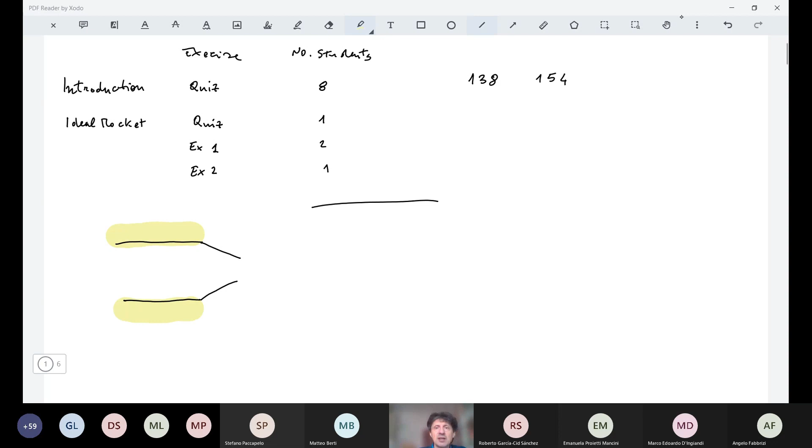So let's see something more. In the last practice class I just gave you an exercise on a solid rocket motor with quasi one-dimensional analysis. We had this problem. We have a converging section here and a propellant which is marked here. So here we have the solid propellant, and the black lines are walls, except where we have propellants.

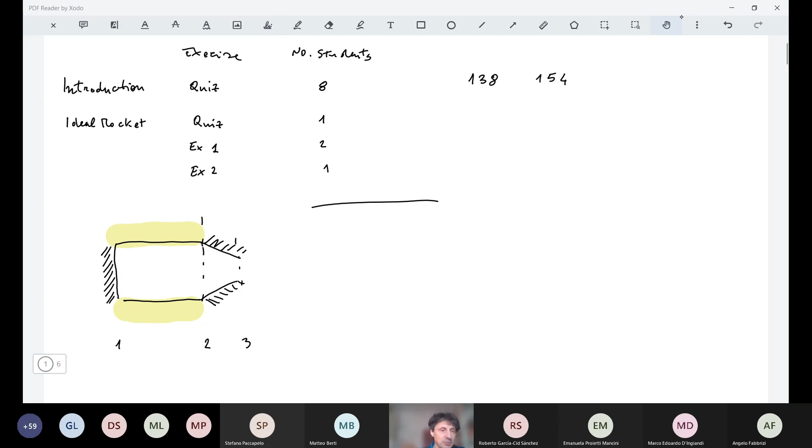So we have a wall here, and here, and here. We consider 3 cross sections, 1, 2, and 3. We have data that should be already available to you from last class: gamma 1.2, R 320 joule per kilogram Kelvin, dot M 150 kilogram per second, T0 3000 Kelvin.

And also the exit area of this convergent nozzle. We know M1 equal to 0, M2 equal to 0.4, and M3 equal to 1. So it's a choked nozzle. And between 1 and 2, we have to consider mass addition with Ux equal to 0 and T0i equal to T0. 2, 3 will be isentropic flow.

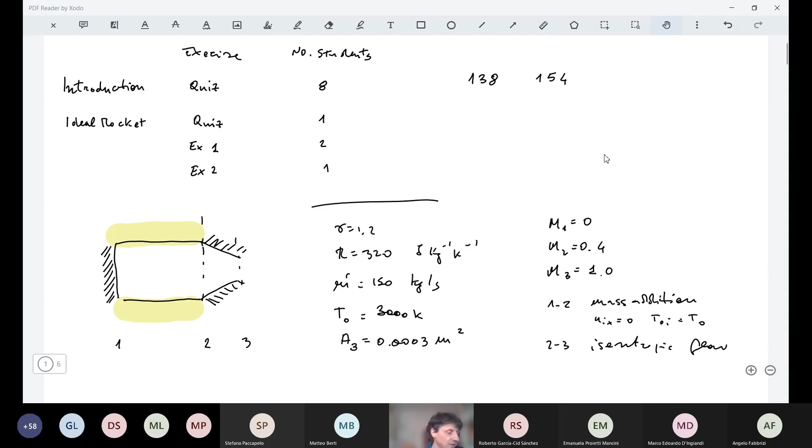So what we have to compute here is the total pressure P01, P02, P03, and also A1, which is equal to A2, is also unknown, whereas we have the value of A3. So I don't know if you solved this problem.

You have to divide it in 2 parts, 1-2 and 2-3, and in each of these parts we can apply a single driving potential, which is mass addition between 1 and 2, and area change between 2 and 3. So we can proceed knowing the Mach number at different positions. So for instance, the fact that we know the value of Mach number in 2 and 3 allows us to evaluate the ratio between areas 2 and 3, and so also the unknown area, which is the same between 1 and 2.

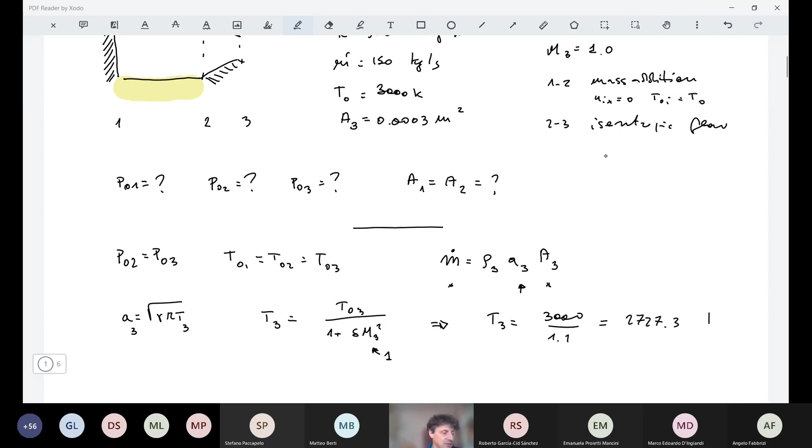And accordingly, a3, with gamma and R from the data, will be 1023.4 meters per second. So the fact that we know all the quantities in this expression except for the density allows us to evaluate this density, the second thermodynamic variable, as m dot over (A times area), and this will be equal to 4.886 kilograms per cubic meter. The density is in kilograms per cubic meter in the international system.

Then for the pressure, we have values with large numbers in the international system, in Pascal, so we often use kilopascal, megapascal or bar. And bar is convenient because 1 bar is close to the atmospheric pressure. So P3, by the ideal gas equation of state, will be rho RT, and it's 42.64 bar.

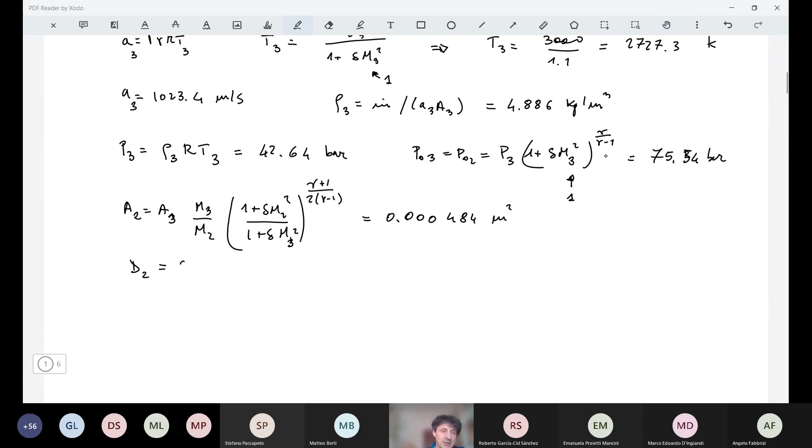If you like to see something without all these zeros, you can say that your diameter will be 2.48 centimeters at the inlet of the converging section, and D3, the throat diameter, will be 1.95 centimeters.

So what remains is the part related to the mass addition, where we have to evaluate the total pressure loss that we know occurs in this case. And so we go back to the relations with y equal to 0. Y was the injected velocity over the local velocity, and if you inject in the perpendicular direction, there is no contribution to momentum from this injection. So we consider the case with y equal to 0.

I recall that the relations were dM over M equals minus 1 plus gamma M squared, 1 plus delta M squared over M squared minus 1, times dm dot over m dot. And we also saw that dp0 over p0 is minus gamma M squared dm dot over m dot. Comparing these, we can eliminate the mass addition and see the relation between the pressure loss and Mach number change in case of mass addition.

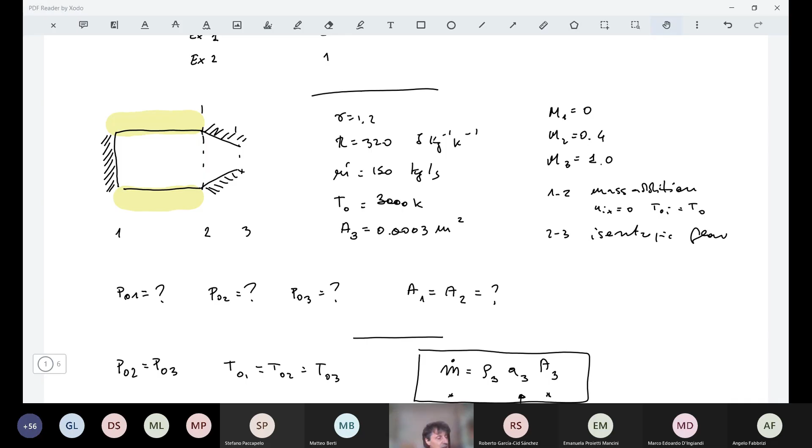So, to sum this up, we have got a number of relations between different quantities that we are using in these one-dimensional problems, and I would like to show you a summary of them that I'll make available, or if you prefer, you always have this in the recording, if that is your preferred way to follow this course. So I have it here.

So you can see this matrix of dependencies, where you have this psi that we see here. This psi is our 1 plus delta M squared, and that appears in many relations. And here you have the relations related to only the area change, only friction as the driving potential, only heat addition, and at the end the case of mass addition with y equal to 0, which is the one that we were talking about in the last exercise. So for instance, in the case that we have only friction, we have no area change, and the same is true also in all these cases. So this is 1, 1, 1.

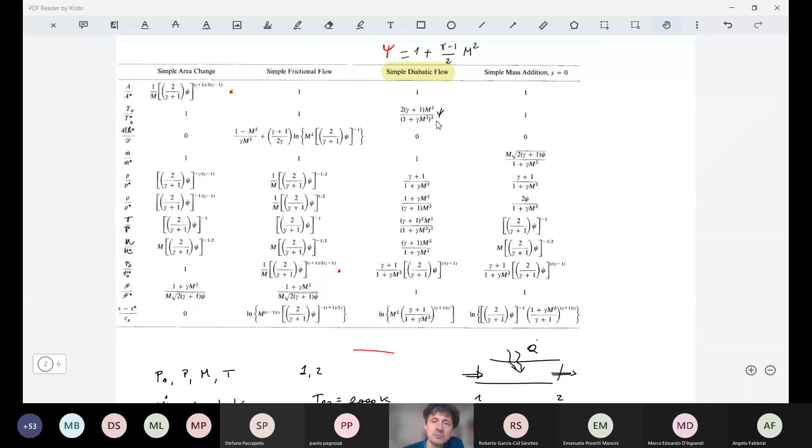The problem that we have is that we cannot extract directly the Mach number from here. So we should make some attempt and try by linear interpolation to reach the final result. So I just copy this expression below, specializing it for our case. And this is our psi that I wrote explicitly. So this should be equal to what we have, 322 over 2000. Or multiplied by 2000, this result I should have 322.

So we can select some tentative value, and we can obtain, for instance, if I try with M1 equal to 0.1, you obtain T01 equal to 86 Kelvin. So it's too low. It means that the correct Mach number is higher or lower than this one. If I have to select a new Mach number to try to close this value, what shall I try? Something less than 0.1 or greater than 0.1?

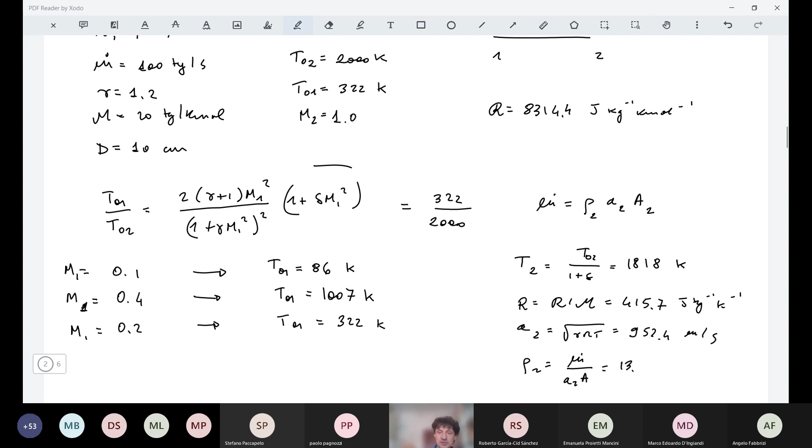The density, as a consequence of the above expression, can be obtained by this relation, and will be 13.37 kilograms per cubic meter. And finally, also the required pressure. Okay, mass flow rate was given here. You see here the mass flow rate, and here the diameter that has been used to evaluate the area. So the exit section has been solved. We still have to evaluate quantities at the inlet, and I need another one of these relations. So I can take this one and calculate pressure, and then the other quantities.

So if I consider this one, gamma plus 1 over 1 plus gamma M squared. This is P1 over P2. And it should be 212 bar. So you see that we have a large pressure change, and it could be interesting to see also the total pressure loss. We can evaluate that at the inlet, where the Mach number is 0.2, the total pressure is not so different. It will be 217 bar, and if you now evaluate total pressure in 2, we have pressure and Mach number also here.

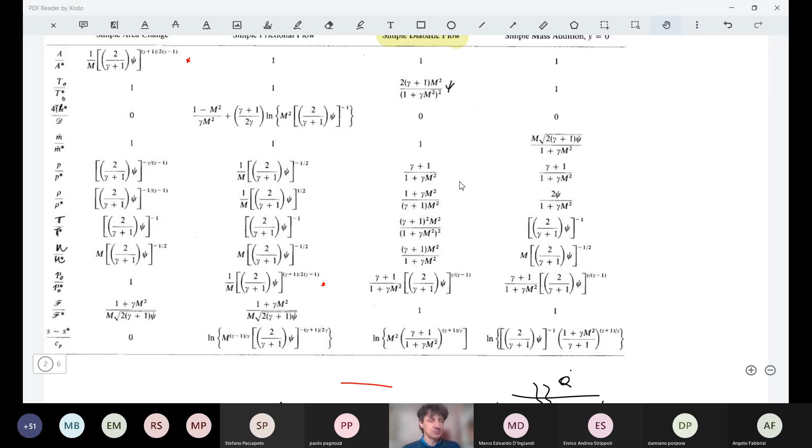So we pass now to exercises related to the ideal nozzle. And we start with the first exercise, where we would like to calculate the exit Mach number ME of a nozzle showing a thrust coefficient in adapted condition equal to 1.8. And we know that gases flowing within this nozzle are characterized by gamma equal to 1.2.

So the first thing that we would like to compute is what is ME with this data, and then we would like also to evaluate the value of DE, the exit diameter. We are considering our supersonic nozzle with exit condition here and throat condition here. So we know that Dt is equal to 5 centimeters, so this is the first part of our exercise.

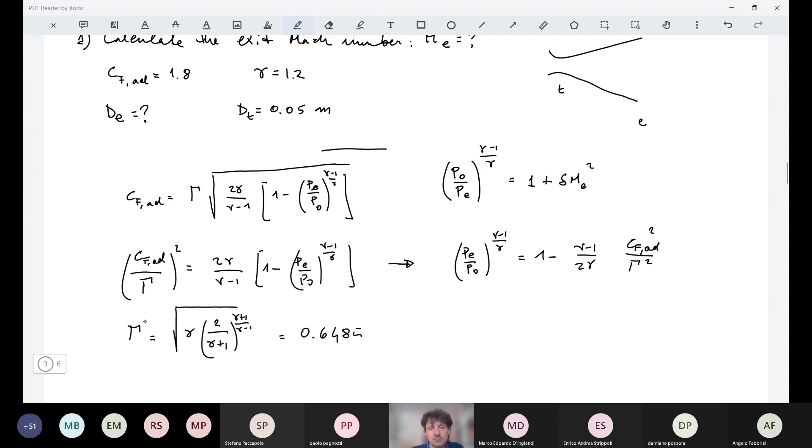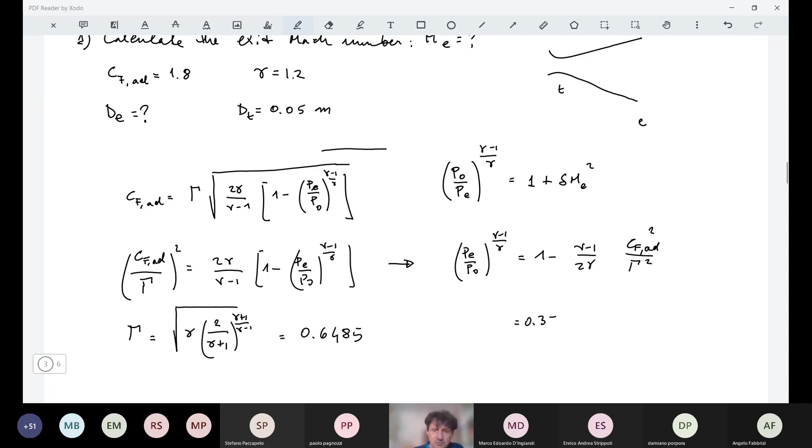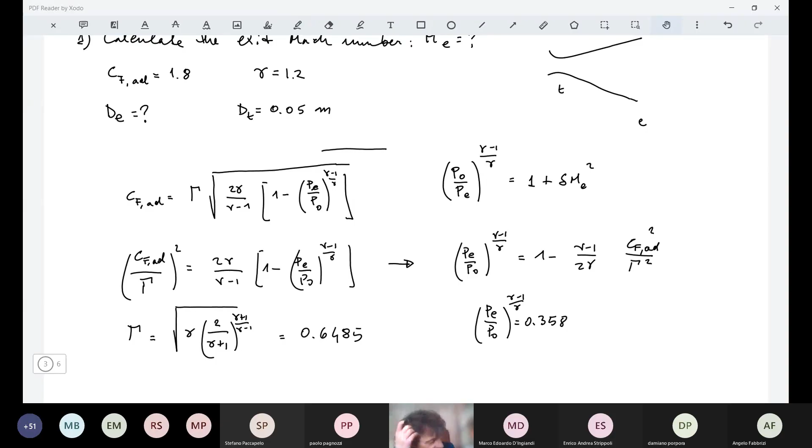And by substitution here, I also can obtain the value of PE over P0 to the gamma minus 1 over gamma, which is the quantity that we need to calculate our ME. So then we can substitute here and obtain that ME is equal to the square root of 1 over delta, P0 over PE, minus 1, over gamma minus 1.

And so we can replace it here. This would be 1 over 0.358. And as a consequence, we obtain that ME is equal to 4.234. So notice here that in this expression of thrust coefficient, we assume that we are considering choked flow. That is one important assumption that we are considering, as well as the one that we used here, which is the assumption of isentropic flow.

So this was the first question. Then the second one is the diameter of the exit, and of course here we can use the area Mach number relation.

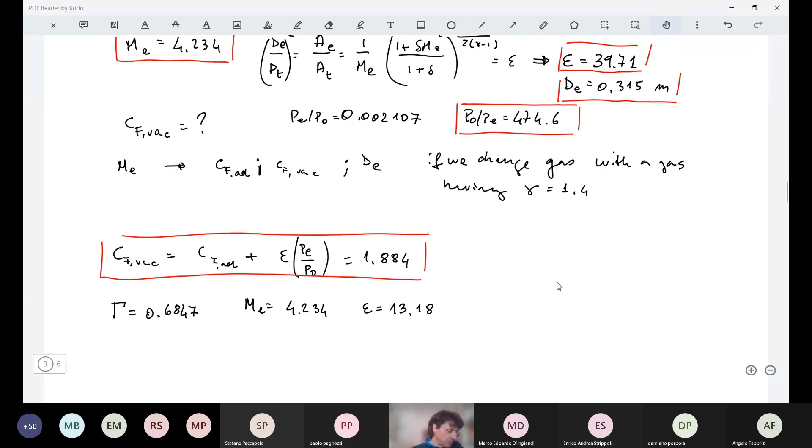So we have ME, of course, is our input. Epsilon will be, in this case, 13.18, to be compared with this one, and you see that it's quite a smaller value of epsilon that is needed for gamma 1.4 gas to reach the same Mach number. And what would be the pressure ratio? So of course this means also that the diameter that was one of the requested outputs is 0.181. Of course it's quite less than what we had before.

And it's also interesting to see what is the pressure ratio we achieve. We have seen that actually we are trying to define our area ratio on the basis of the resulting pressure ratio, so that we can compare with the atmospheric value. And in this case we have also less pressure ratio.

And we have also seen in class that thrust coefficient is improved when you have lower gamma. So here, having higher gamma with this gamma 1.4, we have that our adapted CF will be 1.6 and the vacuum CF will be 1.666. So you see the differences that we have with different gamma with the same exit Mach number.

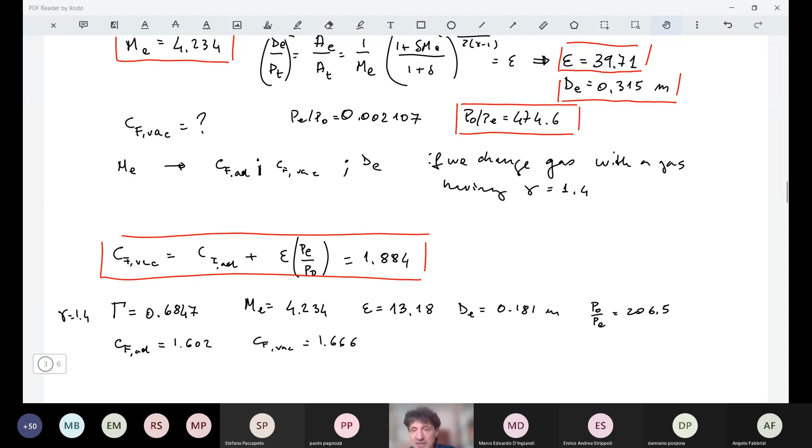This is just with Mach number, it's just straightforward, and we can make also some different reasoning, but we need to iterate. And just to make some consideration, or if you would like to make your iterative procedure, we can compare, for instance, what happens with the same geometry, just changing the gas. So if we have same geometry, it means the same AE over AT, the same epsilon. So instead of considering same ME, we consider now same epsilon.

So we have to find the Mach number such that we have with gamma 1.4 the same epsilon that we have got with Mach number 4.234 and gamma equal to 1.2. So we can make some attempts using different values of the Mach number, and we obtain the right area ratio with Mach 5.6.

So always with gamma 1.4 and Mach 5.6, we have epsilon equal to the requested value 39.71, and to this value corresponds a higher Mach number, as I said, and then a higher pressure ratio: compared to 474.6, it would now be 1035.8. So this is a higher area ratio with respect to the former case, which was 13, and it means that for the same gas we are closer to the maximum value of thrust coefficient.

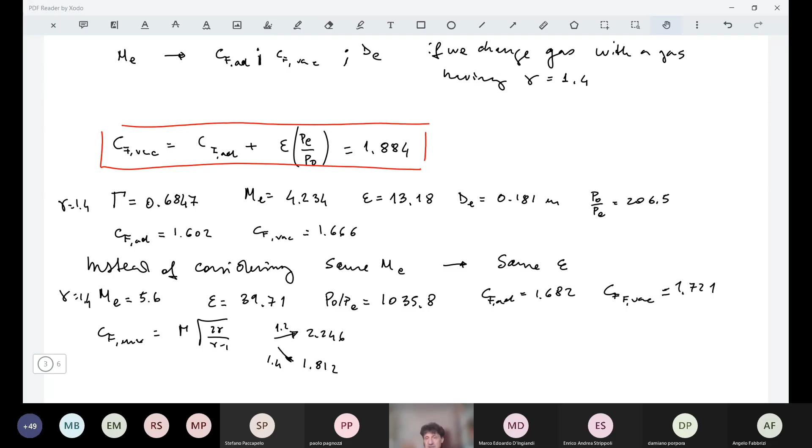So you see here we should compare this value that we got in vacuum with the maximum value, and so it's 1.7 compared to 1.8. That means that we are more or less close to 90% of the maximum value of thrust coefficient.

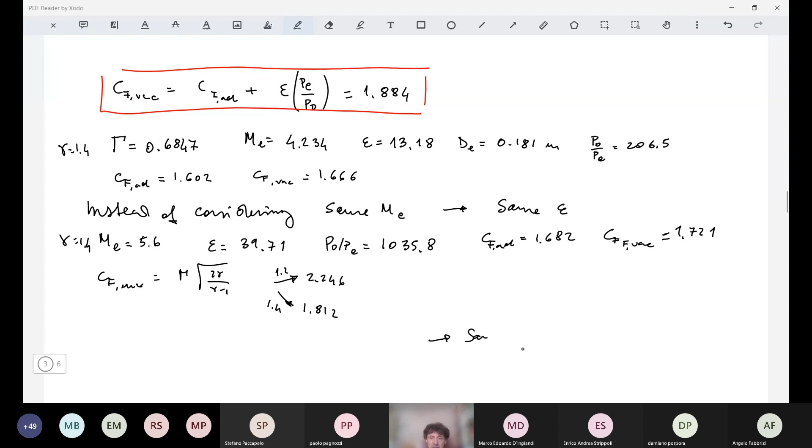Another further comparison can be made now considering the same pressure ratio of the gamma 1.2 case. In this case you don't need iteration, because you have P0 over PE, so you can evaluate your Mach number. It will be 4.9.

And we see that in this case we have something in between. So we have epsilon 23.21, which is greater than the first and lower than the second. And we have, of course, the given value of P0 over PE. And as this area ratio is between these two, this will also be the case for our thrust coefficient: 1.697.

So this was an exercise just to start with relations concerning the thrust coefficient, and this is, let's say, the kind of exercise we should be able to handle easily. And so we can pass now to a second exercise, always related to area ratio, thrust coefficient, and adapted versus vacuum operation. But we introduce here also the characteristic velocity.

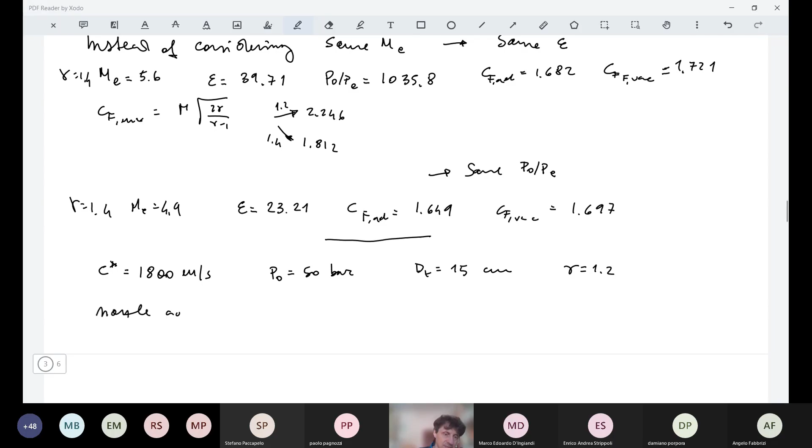So we consider now a nozzle of a gas characterized by a characteristic velocity of 1800 meters per second. We know that we have a total pressure of 50 bar and a throat diameter of 15 centimeters. We know that gamma is equal to 1.2 and that our nozzle is adapted at sea level. So with this information, we should evaluate thrust, specific impulse at sea level and in vacuum condition, and also the thrust coefficient.

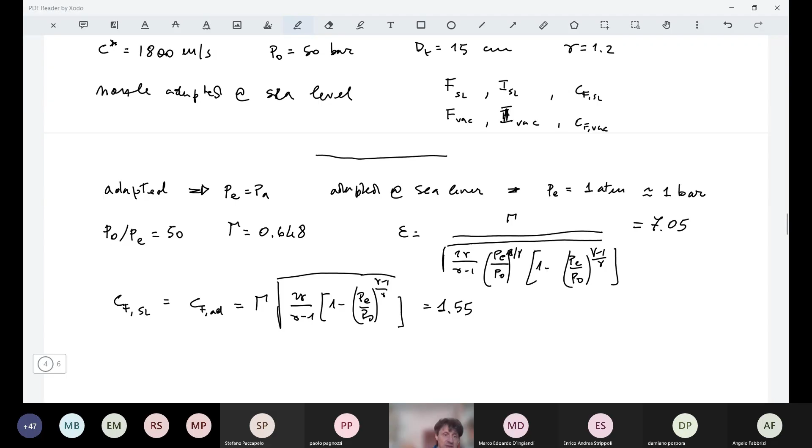So the same gamma as before, but we have a smaller pressure ratio. This time it is 50 compared to 400 in the other exercise, and so we have an area ratio of 7 compared to 39, and so we have a quite smaller value of the thrust coefficient. Then, because with this assumption P0 over PE is 50, we also have the evaluation of the vacuum thrust coefficient.

So this is sea level because this is the adapted value, and it will be 1.69. And what we had to compute, at this point we have to compute thrust. So we need the throat area, we have the throat diameter, so we can compute and obtain this value, and it follows that F at sea level is equal to 137.4 kilonewtons. So this comes from this relation.

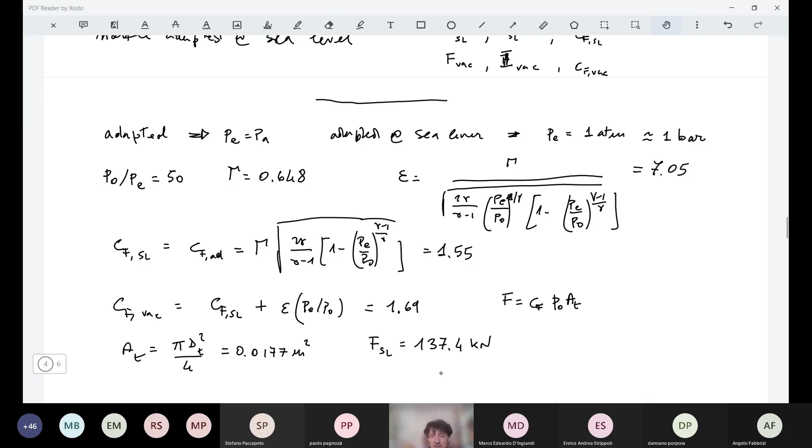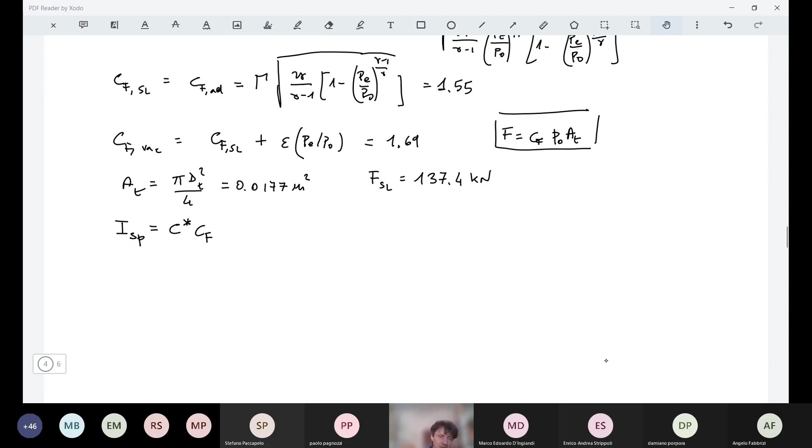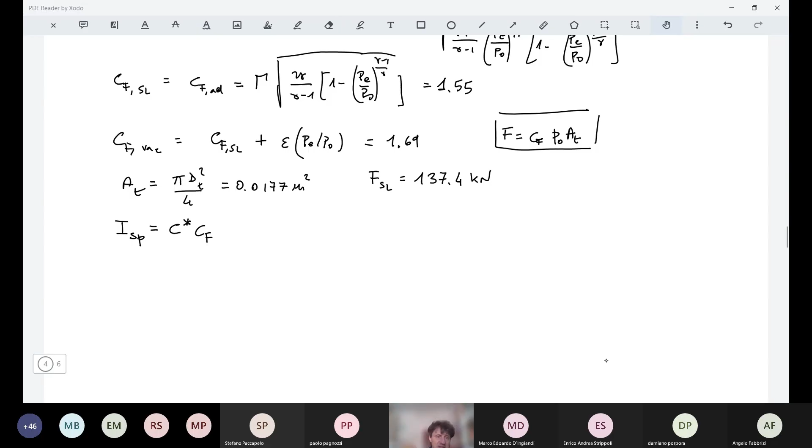So what will be the specific impulse? We recall what we have seen last time, that specific impulse is the product of characteristic velocity and thrust coefficient. We have among data the characteristic velocity, so we can evaluate through the thrust coefficient the specific impulse that we have at sea level. And it will be 2,798.7 meters per second.

We have seen before that this is 2.246 for gamma 1.2, and so we see that the maximum specific impulse that we can obtain in this case is 4042.8. So you see here that having expanded not so much our jet, because we have just this 7 as the area ratio and 50 as the expansion ratio, our specific impulse is rather small. Also in vacuum condition is 3000 compared to what theoretically we can reach with expanding up to zero pressure with an area ratio of infinity. That is of course theoretical, but is the upper boundary that here is rather far. And this is far because we are only exploiting a limited pressure ratio.

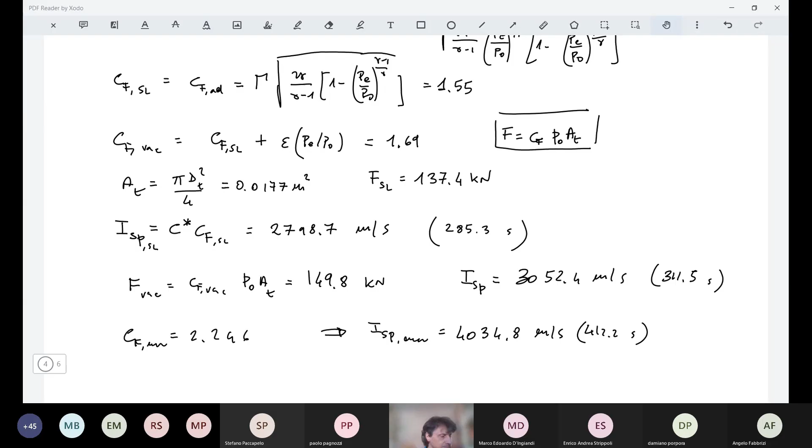Final exercise for today. We consider now a rocket operating in overexpanded condition at sea level. So say at sea level we have again PA is equal to 1 bar, and the nozzle is operating at the limit of overexpansion before separation. We know that the limit is coming from this value of pi, that is the ambient to exit pressure, that is assumed to be for this nozzle equal to 4. So we would like to work at the limit of flow separation. We don't like to have flow separation, but we will be as close as possible because we like to overexpand and adapt at higher altitudes.

And we have also that C star characteristic velocity is, I have to check this value, but should be 2270 meters per second. Now, if we know that specific impulse is 430 seconds in adapted condition, and that molar mass is 14 kilogram per kilomole, we would like to know the values of total temperature and total pressure that we have in this nozzle. So we know the ambient pressure, that we are operating at sea level at limiting condition for separation, we have C star, we know the specific impulse in adapted condition, and we like to know the total temperature and total pressure.

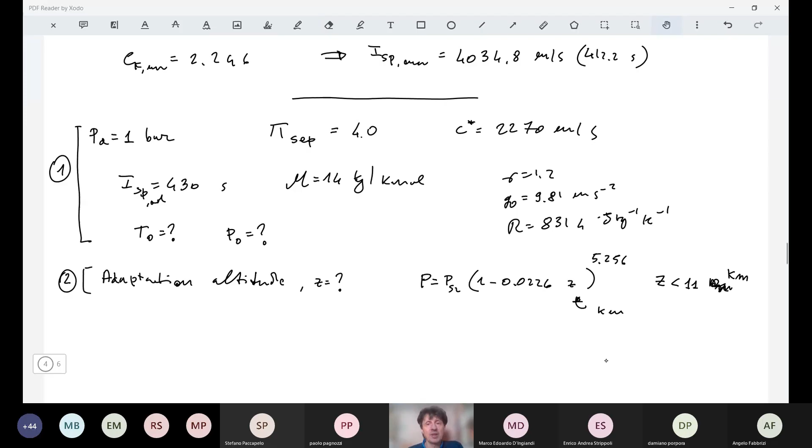So we have to evaluate these quantities. Here we have an important information: if we operate at sea level and PA is equal to 1 bar, with this pi equal to 4, it means that at sea level the exit pressure is 1/4, that is 0.25 bar. So we know the exit pressure, the specific impulse and the characteristic velocity. From specific impulse and characteristic velocity we can get the thrust coefficient, and from the thrust coefficient we can obtain the corresponding pressure ratio. Once you know the pressure ratio and the exit pressure, we can obtain the total pressure, whereas the total temperature is related to the characteristic velocity by the expression that you have got in class in case of our ideal nozzle.

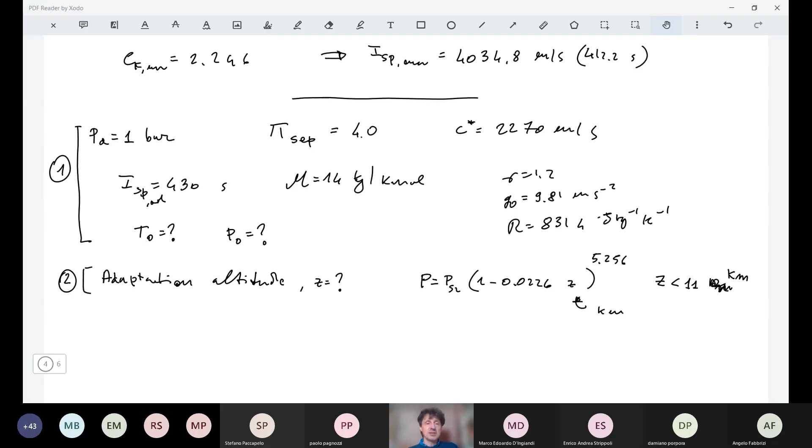So we can obtain total pressure, total temperature, and then you have just to find at which altitude you reach the pressure of 0.25 bar. So you can do this exercise; it's a simple exercise, but this kind of exercise is important to practice with thrust coefficient, characteristic velocity, specific impulse, expansion ratio. That is something that, as I mentioned before, we should easily handle.